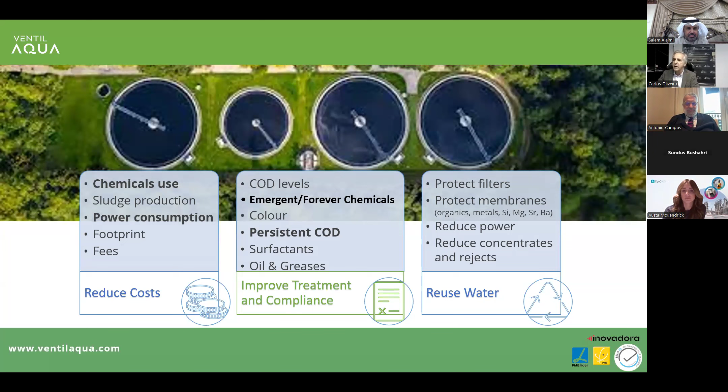For you to have an idea of what reducing chemicals means, here's a short indication of the major chemicals we use today for water treatment. PAC-18, or aluminum polychloride, ferrous sulfate, and ferric chloride are the major chemicals used for water treatment around the world, either for drinking water or wastewater.

These chemicals are used in huge quantities all over the world. To give you an idea of the scale, only 10 to 20% of these chemicals are active products. The remaining 80 to 90% is just waste that we are putting into water, which makes it more difficult to reuse water later on. The cost associated with these chemicals, in fabrication, shipping, stocking, and dosing, means all the energy associated with them is being lost, because only 10 to 20% of the product is really active and brings us a different water quality.

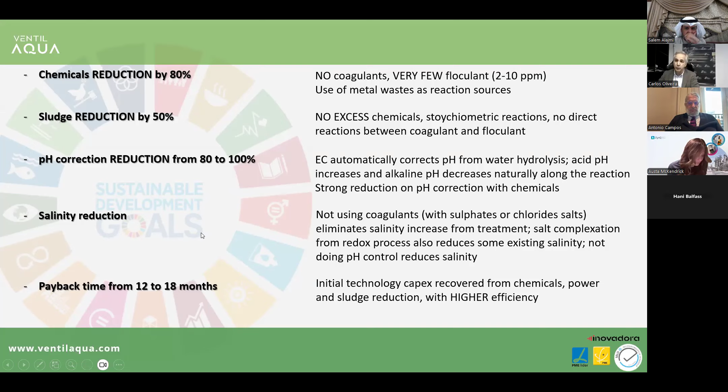All these technologies have a relatively low payback time compared with conventional equivalent technologies on the market today. So we have an opportunity to move into these new technologies, mainly by revamping and retrofitting existing plants, increasing actual plant capacities rather than replacing them with new plants. By increasing capacity, you reuse facilities and reduce the need for investment and increased power consumption.

When you apply these new technologies, you can remove persistent and new contaminants from water.

This is a challenge that the world is yet to wake up to, because these are new requirements that will flood the market very shortly from water authorities around the world. Through these technologies, you can remove much more than conventional technologies allow today.

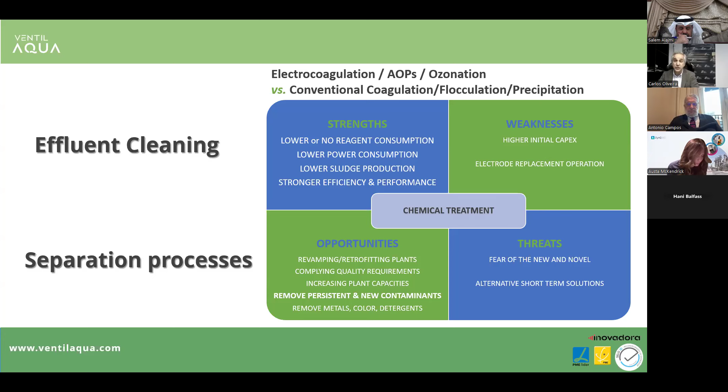My appeal is that around the world, people can look to these new technologies and understand that the world needs this to move forward and reach these new targets and this new level of water reuse.

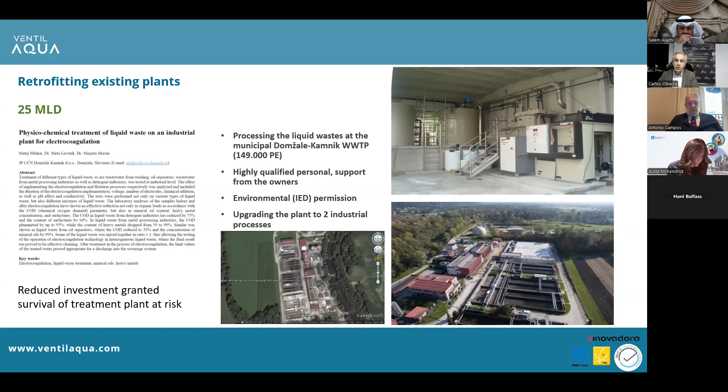I'll give you some application examples so you understand we're talking about something that already exists in the market, not just lab technologies. Common municipal sewage treatment plants can be retrofitted by introducing these technologies and increasing capacity. Instead of replacing existing treatment plants, we can take the opportunity to use them and increase their treatment capacity.

We also have landfill leachate, a common problem in every country. We were talking before about waste production and waste burning, and landfills are a huge environmental problem related to leachate or water drainage. These technologies allow landfills to improve their environmental footprint by removing a lot of the contaminants that usually cause trouble.

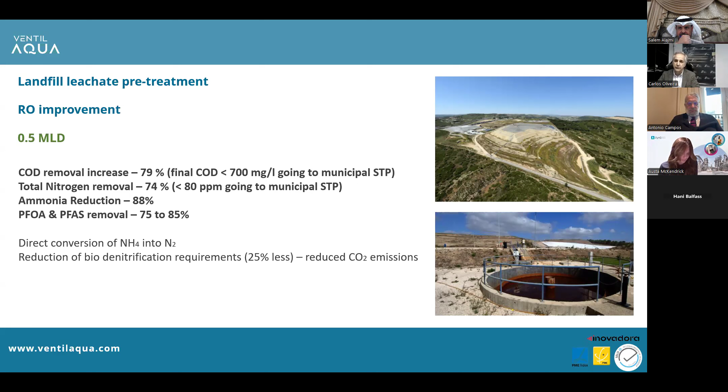Drinking water treatment in the GCC area has some challenges, namely silica removal, because silica attacks and blocks membranes, clogging the systems. By removing silica, you can improve membrane lifetime and reduce the power consumption required to desalinate seawater. This is another example where these new technologies can improve performance and help existing facilities reduce power consumption and eliminate contaminants.

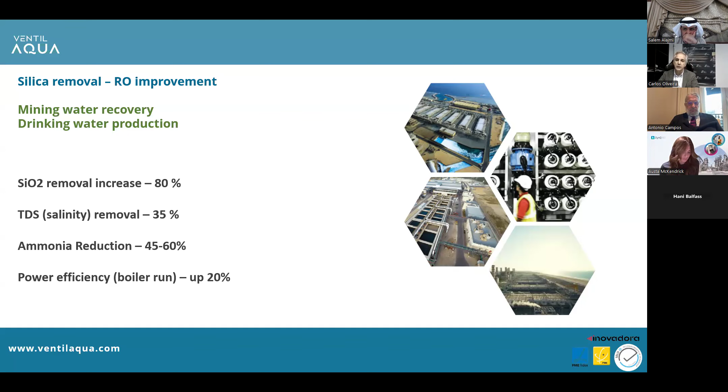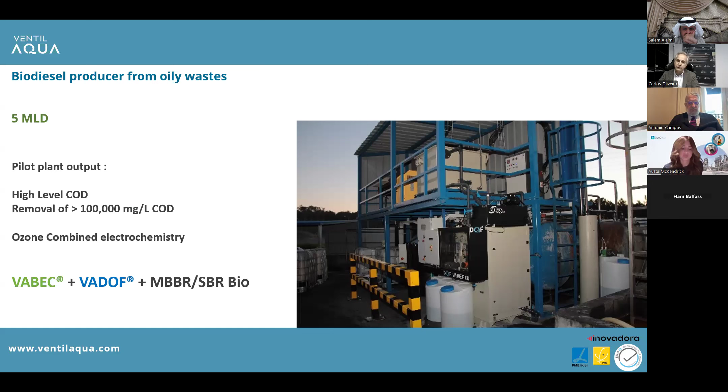In oil and gas industries, applying these non-conventional technologies can leverage the efficiency of existing systems, reducing contamination of wastewaters and allowing for water reuse afterwards. All these elements already exist, as well as in other applications like shopping malls, water reuse, textile industries, automotive, detergents, food, and industrial wastes.

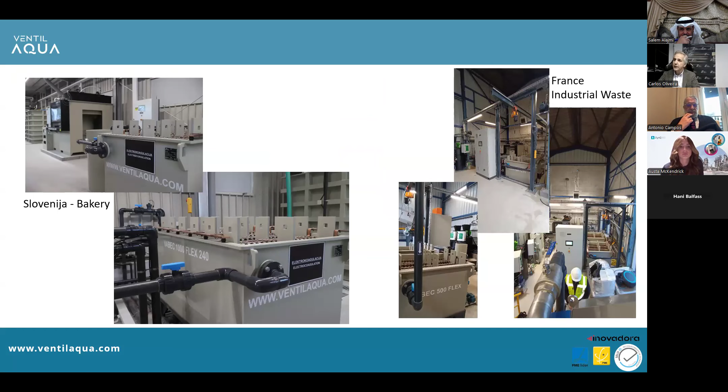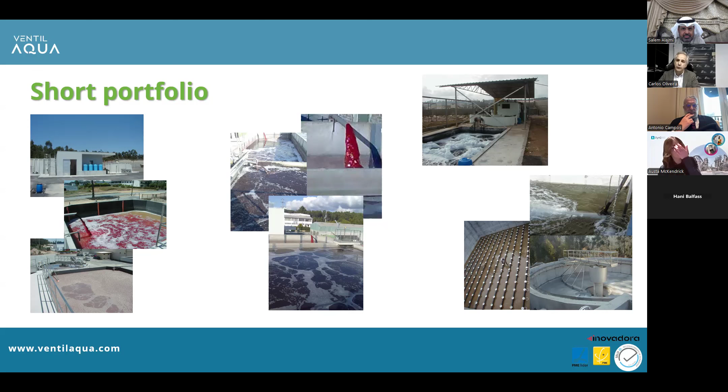Plastic recycling, chemicals—all these are industries that exist around the world and face these challenges of, at the same time, improving compliance and reducing power supply. I hope this is good enough to raise awareness on these problems.

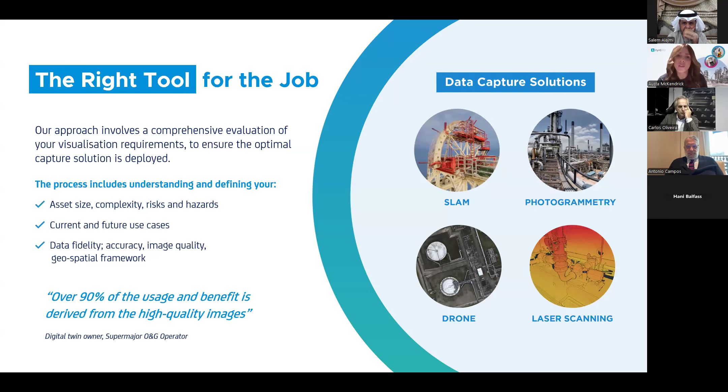So it's just general operations, maintenance, planning, inspections, remote engineering, turnaround and shutdown planning. But then we do have different use cases coming up all the time with our different customers. Our customers that have adopted our software are very proud that their teams are fully immersed in their digital twin, and they're always looking for different ways to use the twin and the data.

So really providing your staff or your potential staff a truly immersive experience when it comes to training and familiarization. When they're going out to do a job, part of that pre-planning would be to immerse them in what is to be expected when they come onto site, so they are prepared before they go.

And then other things like incident investigation. We've had some instances where customers had an incident on site, maybe a fire, and they had the capture done beforehand, and then they've had a fire. So for insurance purposes and just for incident investigation purposes, they were able to use that twin to go back and sometimes retrace steps on what could have happened in the incident, but also just to go back and rebuild what was there before, and then to renew following something like a fire.

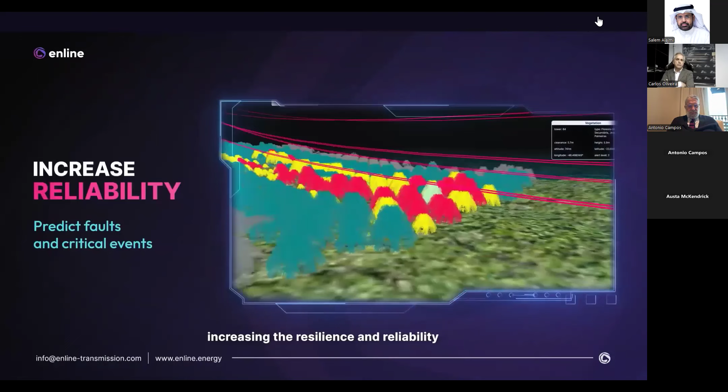We implement our solutions completely remotely, anywhere and anytime, up to 12 times faster than traditional technology, without deploying additional physical sensors or requiring shutdowns for installation.

Enline's proven track record shows significant reductions in costs, outages, energy congestions and losses, and increases in data accuracy and fault detection. Whether it be design and construction, monitoring and maintenance, or future-oriented operations, we have software applications to address the needs of a wide range of industries and customer types.

We continue to increase our presence worldwide, providing cutting-edge solutions aligned with the global goals for sustainable development. Enline's work and experience has been recognized through many awards by the most knowledgeable institutions in the sector.

All of this is possible thanks to our international team of software experts, power system engineers, physicists, mathematicians, AI data scientists, cybersecurity experts, and many more industry professionals. We invite you to join the next digital revolution with Enline, powering the future today.

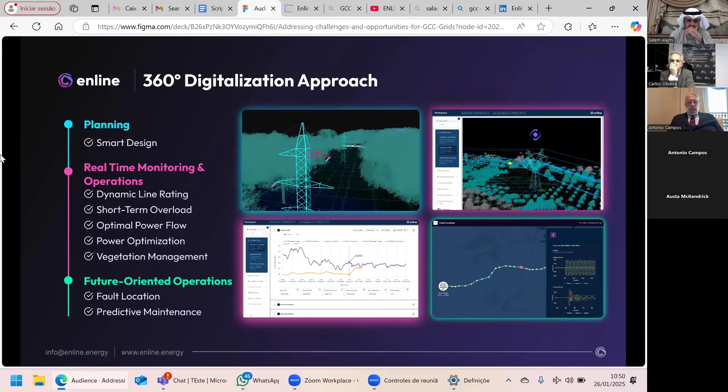And we have many, many projects around the world, and even starting some of them in the GCC area.

How this works: we use existing data and science. We use existing knowledge and formulas from mathematics and physics, and existing data from the customer—data from towers, conductors, isolators, transformers, location, type of soil, weather data, satellite images—and we create a digital twin based in the cloud. We can deliver many outputs from real-time and predictive monitoring, optimization of operations, protecting assets, and optimizing design. This is very unique.

Explaining this technology in three main words: first, sensorless electromagnetic models. This means using a cloud-based solution, using internet, with IP-owned technology developed by us. Using science, we create these digital twins, and they are live digital twins, not static. We can see all electrical, mechanical, thermal, and weather variables in each part of the asset, meter after meter.

Second, data science and AI. This is quite important—AI is huge, and the potential of AI is huge. Why? Because AI brings us a lot of information, especially for predictive purposes. We can understand the behavior, we can be prepared, we can make simulations. AI and data science are super important in the construction of our models.

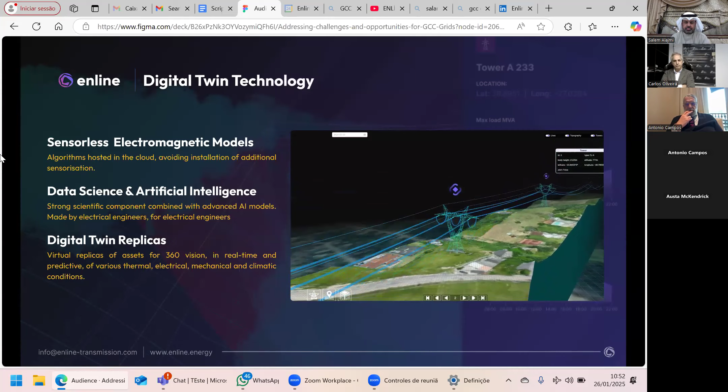Here I give you two main case studies with real customers. The first is in Spain, Red Eléctrica, the main TSO in Spain. We started with small lines; now we have 6 transmission lines and are solving problems like dynamic line rating and vegetation management. We increased transmission capacity by almost 30% on congested lines in Ibiza during summer, peak demand, and very high temperatures.

All the lines were congested, and we solved the problem. The impact is huge, more than 100 million euros per year, with many challenges, but the solution was implemented very fast and is working successfully.

The second example is with a TSO in Finland, where we started with 50 kilometers of 400 kV lines with a huge impact. Now we are implementing the next stage: a tender for 6,000 kilometers, for a total of almost 15,000 kilometers.

We implement these processes in very few days—it's super fast, super competitive, and we don't have competition at this level. This is a revolution because, again, we are not using sensors, we are not traveling—the whole process is remote. It's really a big revolution in the way we can digitize power grids.

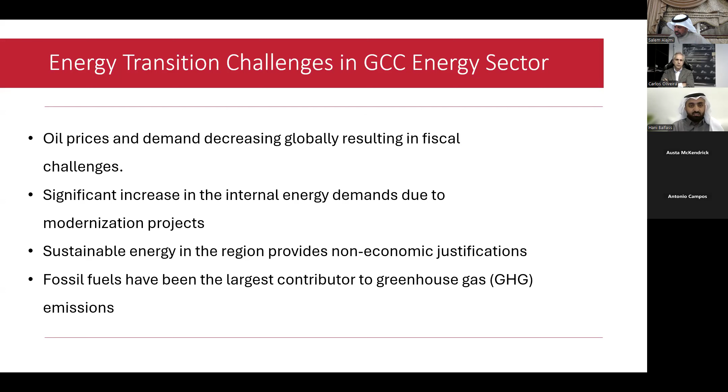Fossil fuels have been the largest contributor to greenhouse gas emissions. This is one of the main challenges for energy transitions. Greenhouse gas emissions in the area are the highest globally. In the global ranking for emissions per capita in 2021, Qatar is first at 35.59, expected due to the 2022 World Cup project and modernization for the events. Bahrain is second, Kuwait third, Emirates sixth, Saudi Arabia eighth, Oman ninth. So the GCC countries dominate the top 10 of the global ranking for CO2 emissions.

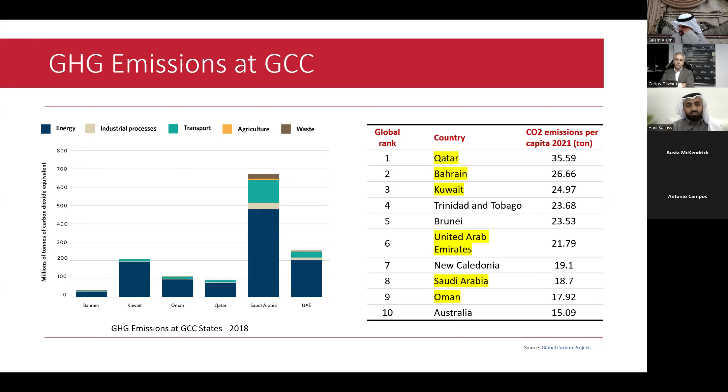Energy transition programs planned and approved in GCC: for the carbon circular economy, Qatar, Saudi Arabia, and Emirates have accelerated investment in CCS facilities. Currently, they capture approximately 12% of global CO2. Saudi Arabia has green initiatives to plant 10 billion trees in the country, and the Middle East Green Initiative will plant 40 billion trees in the Middle East. This is one of the approved and accelerated programs. Saudi Arabia is investing around 1.2 billion in green buildings, retrofitting around 90,000 mosques to become green buildings.

GCC energy transition programs include net zero targets for GCC countries. Saudi Arabia 2060, United Emirates and Oman 2050, Bahrain and Kuwait 2060. The programs include support for low carbon technologies such as green hydrogen, which is one of the main programs GCC governments support, circular carbon economy, increasing engagement with carbon markets for the main companies in the GCC, and domestic energy efficiency initiatives.

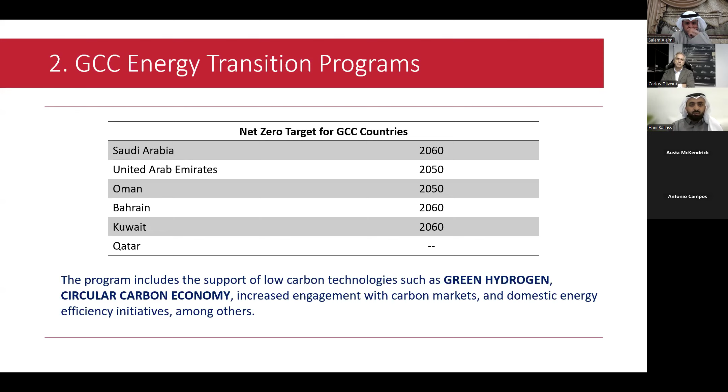For renewable energy penetration, there are targeted energy mix goals. Saudi Arabia targets 50% of the energy mix by 2030. UAE 44% by 2050. Oman 30% by 2030. Bahrain 20% by 2035. Kuwait 15% by 2030. Qatar 20% by 2030. In 2021, renewable energy formed almost 1% of the energy mix of GCC states, so this shows that in just 10 years, GCC governments have taken serious steps to reach their targets, inshallah, by 2030 or 2050.

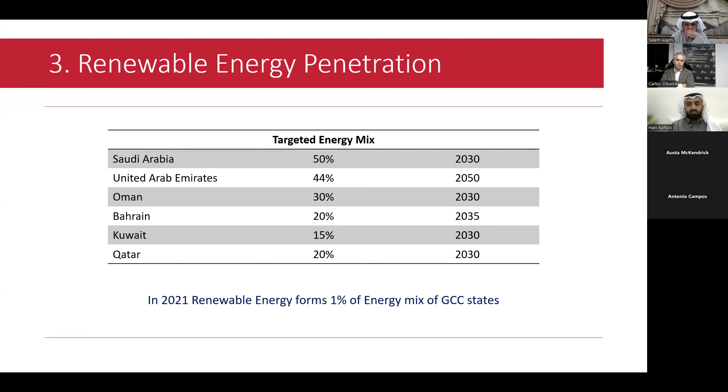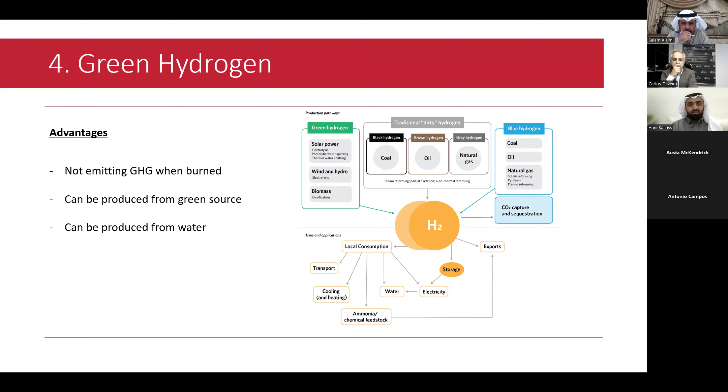For green hydrogen, there are lots of advantages. No emitted greenhouse gases when burned. Can be produced from green sources and can be produced from water. So that shows us the main green sources is green hydrogen, and there are lots of programs to produce green hydrogen.

Oman, Saudi Arabia, and UAE take the lead with the main nine projects in the area for these countries. In 5 years, Saudi Arabia will spend more than $19.4 billion for producing green hydrogen, Oman $14.5 billion for the same production, and UAE $10 billion. So the GCC transitions for energy, they take serious steps. Inshallah it will be achieved soon.

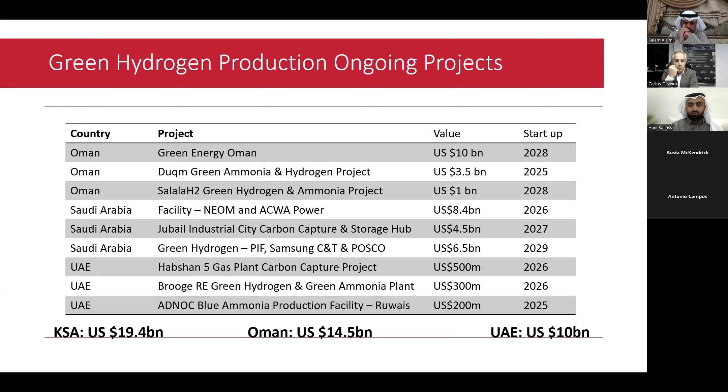There are for sure challenges and for sure solutions. One of the challenges is high upfront cost, which is obvious. Meeting net zero commitment will require increasing funding, and ROI challenges are increasing. Net zero commitment needs increased funding while oil pricing goes down. So it is kind of a challenge.

The solutions are to collaborate with investors and financial institutes to encourage the creation of innovative financial programs or products, increasing grant funding, or enabling debt financing without requiring government guarantee. These are two solutions.

Industrial leaders believe generative AI has the potential to improve the way we use AI in this transition, to improve maintenance, production, supply chains, and among other areas. This kind of study shows that if we use AI, it would have significant impact on these functions: improving maintenance by 70%, production optimization 58%, supply chains 54%. These studies show us how important it is to use AI to reduce cost in energy projects.

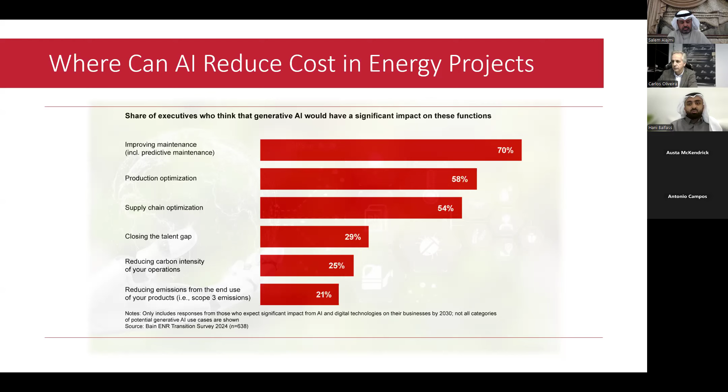One of the challenges is stakeholder engagement. We need participation from all stakeholders - public, private, regulators, and institutes - to promote social dialogue, partner across sectors to scale new ventures, and create sustainability, employment, and development opportunities.

One of the challenges is driving equitable employment. The energy transition will create 30 million clean energy jobs by 2030. That needs new skills and specializations. Measures and policies will be included to minimize the impact on worker livelihood.

So for these challenges, the solutions are to develop sustainable academic and certification programs, employee incentive programs to employ affected community workers, and motivate global experts' movement to the territory. I know Saudi Arabia and UAE have taken serious steps in this kind of motivation.

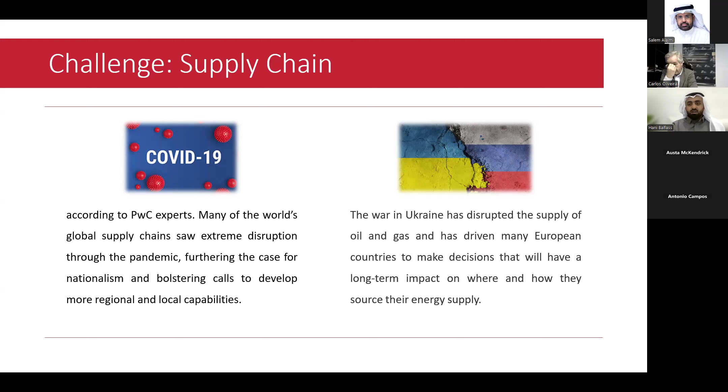All these are challenges for supply chain. One of the solutions for supply chains is to enable localization programs that have a positive impact on the national GDP. Approximately 65% of global customers would prefer products made in their country - geographical proximity, time zone alignment, shortest lead time, and better service delivery.

These are advantages for localization: job creation, easier to travel to support and meetings, and low cost for logistics.

So what is the impact expected if the GCC moves for energy transition? Expected impact: GCC states' GDP to jump up to 13 trillion by 2050 for all the GCC countries, accelerate their economic diversification, reduce domestic demand on fossil fuel, boost localization initiatives for proper security, and cut greenhouse gas emissions by 278 million tons by 2030, pioneering clean energy, climate technology, and innovation.